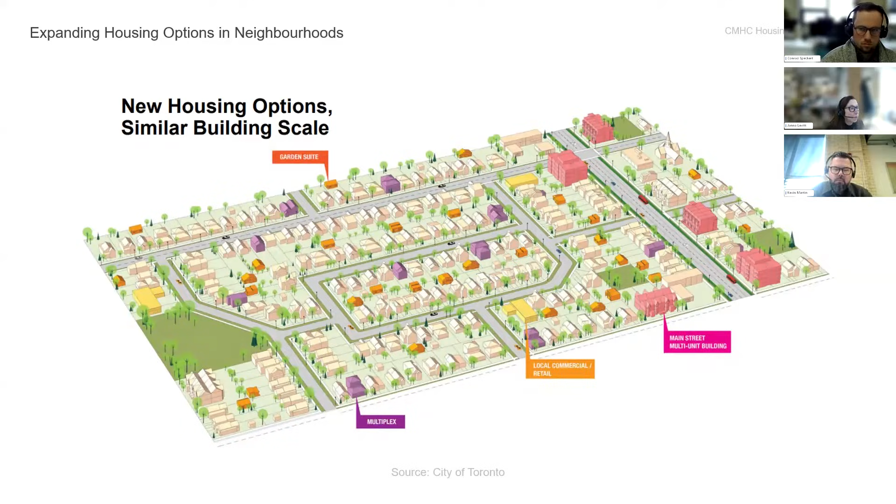So there have been a lot of really good changes in the city of Toronto with respect to zoning regulations and the liberalization of zoning to allow more housing on what we would call in Toronto the yellow belt, single-family zoning districts in the city. We have worked hard with EHON in a lot of ways to start to allow for this kind of gentle density, which includes multiplexes up to 4 units, and now moving to up to 4 stories, plus small apartment buildings up to 6 stories. The diagram that you see in front of you is from the City of Toronto, and it shows their goal to upzone existing single-family neighborhoods to support more diversity and introduce this kind of gentle density.

What this leads to is a kind of rollout of a building typology that's quite limited. You only can have, except at the corners, single aspect apartments, which means you can only have windows on one side. Very difficult to get fresh air and ventilation, so the whole passive ventilation strategies are very limited. And although it has certain efficiencies, and you can argue greater efficiencies with large scale buildings, for small scale buildings, it becomes very challenging to do something that's cost effective.

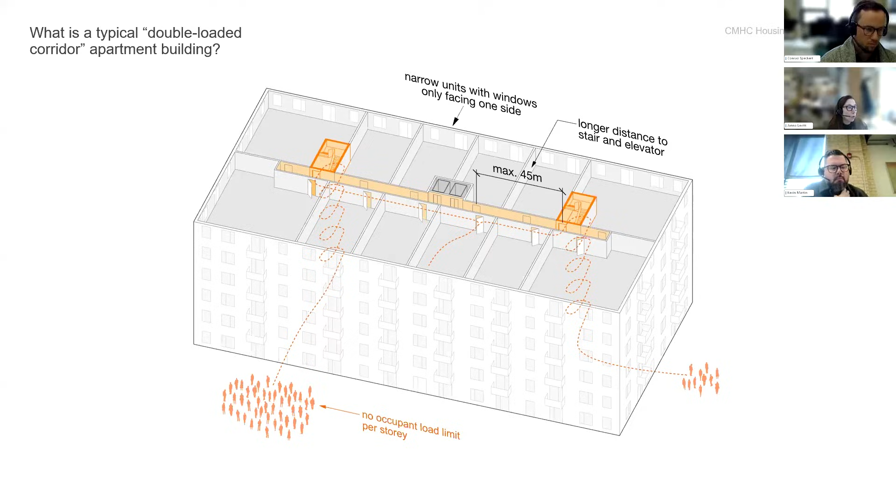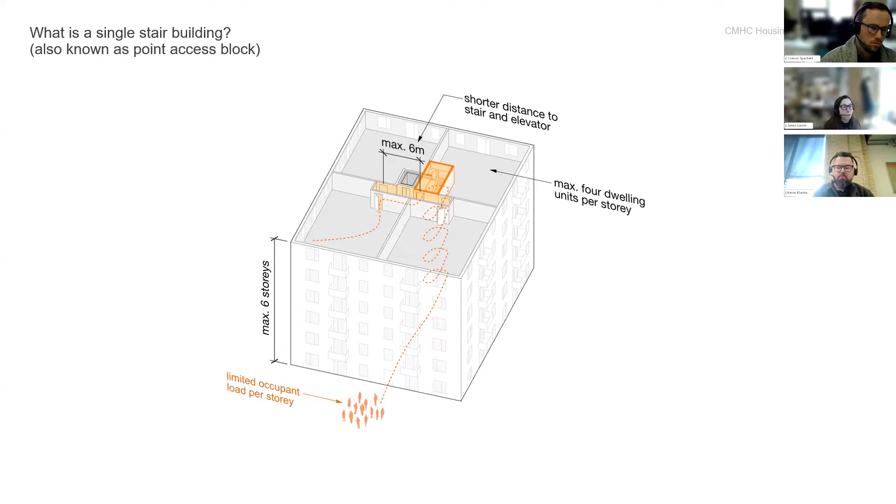The concept does not apply to large scale buildings. This is really for small scale buildings. So what does that mean? That means a maximum building height of 6 stories, a maximum of 4 dwelling units per floor, a limited occupancy load per story, and a short travel distance to the exit. These are the kinds of prescriptive measures we're introducing to compensate for the reduction of 2 stairs to 1. And we would argue, and there's a lot of work by consultants that make the compelling argument that this is equal, if not greater, than having 2 exit stairs.

So the missing middle problem is one we would say has to do with allowing changes to the building code to make the development of smaller sites more viable. Making missing middle and mid-rise housing easier to build to us is as much about reducing the exiting from 2 to 1 exits, so that you can get more residential floor area per floor plate, and also allows for the development of smaller lots.

And when I say that, I mean, when you can build smaller buildings, you move away from multi-unit residential that requires a large amount of capital to fund the project. You can also get away from land assemblies because you can build on a smaller site. And you don't have to, right off the bat, acquire large properties to develop a multi-unit residential. So it opens up the amount of lots that are available as infill and new lots in primarily municipalities that are well developed at the moment, but can accept a turnover at the scale that we're talking about here.

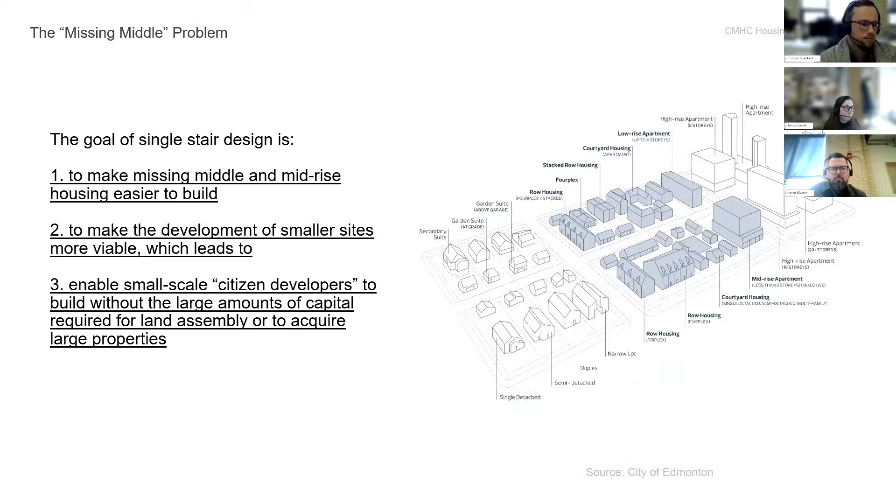Hi, everyone. So as part of the CMHC Housing Supply Challenge, LGA over the past year has been collaborating with 10 other architects and building code experts across the country to develop single stair designs. And these are for different types of small residential buildings of up to 3 and 6 stories in height. Each team has submitted an alternative solution to the authorities having jurisdiction for review.

So some of you may be asking, what is an alternative solution? Applying the prescriptive provisions, the acceptable solutions in the code, is one option for compliance. They, by default, meet the code's stated objectives. But the other option is the use of alternative solutions. These have to satisfy the same objectives assigned to the prescriptive code. And so in other words, any proponent of an alternative solution has to demonstrate that the alternative solution performs as well as a design that is prescriptive, as well as, not well enough.

And the intent statements, when we look at the requirements in the code currently for 2 exit stairs, speak to limiting the probability that persons and emergency responders will not have a choice of alternative exit. And so what that means is that any alternative solution that eliminates the choice must therefore demonstrate that the probability of this risk is mitigated to the same level of performance.

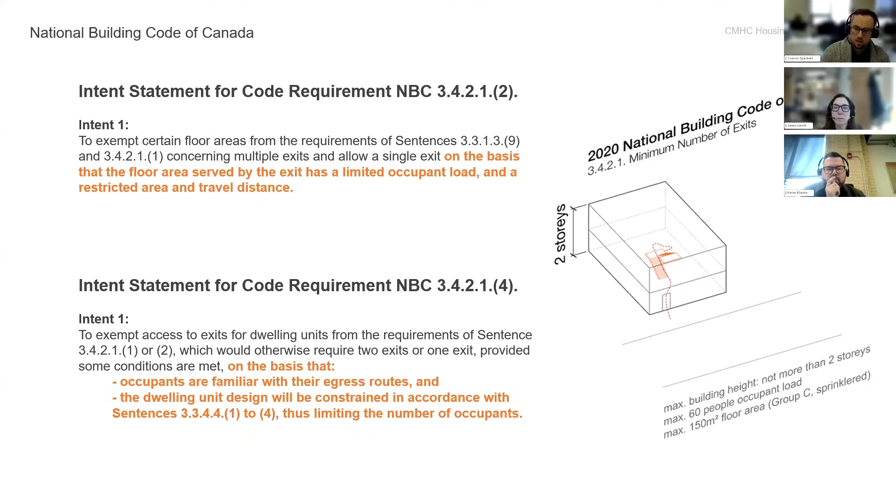But the intent statements around the exceptions also speak to the basis that floor areas can be served by 1 exit if they have a limited occupant load, a restricted area, and travel distance. Another intent statement also speaks to the basis that you can have 1 exit if occupants are familiar with their egress routes and the dwelling units are designed and constrained to limit the number of occupants.

Single stair in Canada is also not a new idea. It's been receiving a lot of attention recently, but we can go back to 1984 when 2 architects wrote a research report for CMHC documenting the differences between Canadian apartment building layouts and other jurisdictions. In 1993, a very well-known Canadian architect, Eb Zeidler, wrote an essay and then a news article specifically on this issue, saying that if there is an intent to develop Main Street housing, the requirement for 2 exit stairs along with parking requirements is a very significant barrier to doing so.

And in the mid-1990s, the former assistant director of the Ontario Building Code wrote a study proposing single stair changes to the code. And so today, 40 years since the original CMHC work, this technical issue is receiving more attention. And the US also revised their limits on single stair about 20 years ago in recognition of the performance of sprinkler systems. And so a discussion around alternative solutions to address this issue across Canada is long overdue.

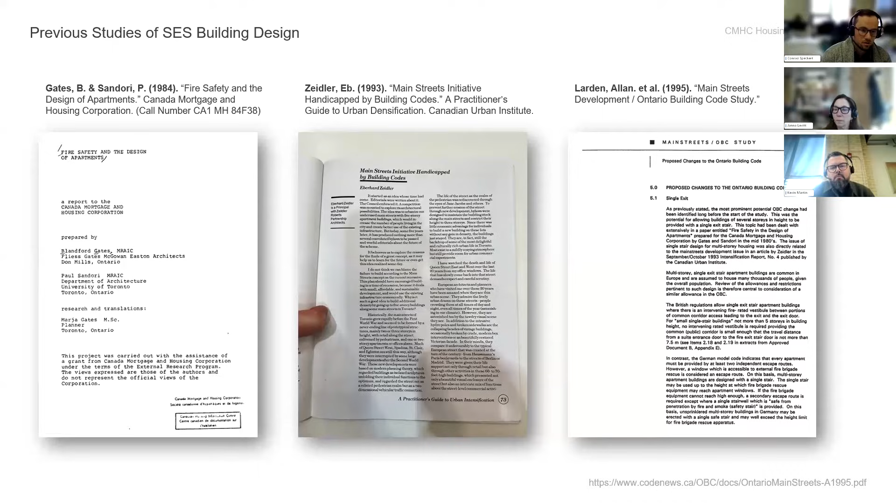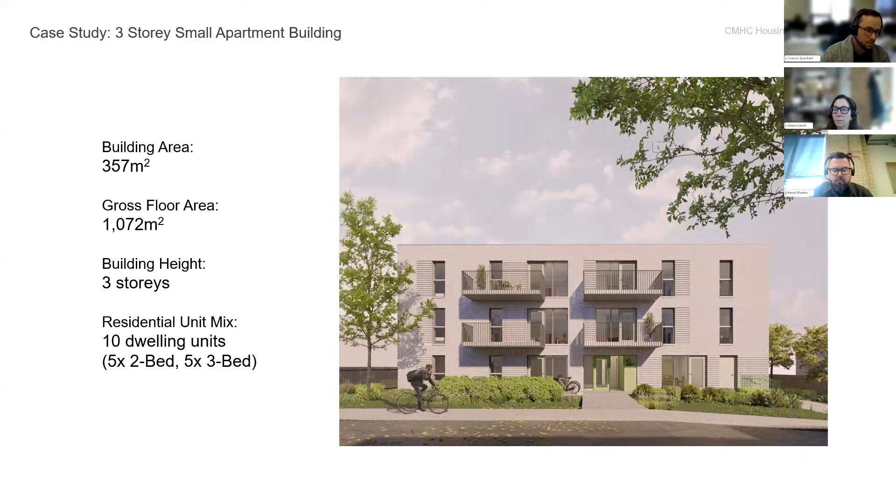Now here's a rendering of one of the projects that we are looking at for a 3-story small apartment building with 10 dwelling units. There's 5 2-bedroom units and 5 3-bedroom units. The zoning bylaw says here that you can build a small apartment building or you can build a row of townhouses on the same lot. And so typically a developer would turn this into a row of 4 townhouses. But in our case, the land belongs to a community land trust and they are looking to build rental housing.

With single stair, the difference between these 2 scenarios on the same property and with the same overall building footprint is yielding 4 extra bedrooms and, more importantly, a fully accessible building with an elevator where otherwise it would not be accessible.

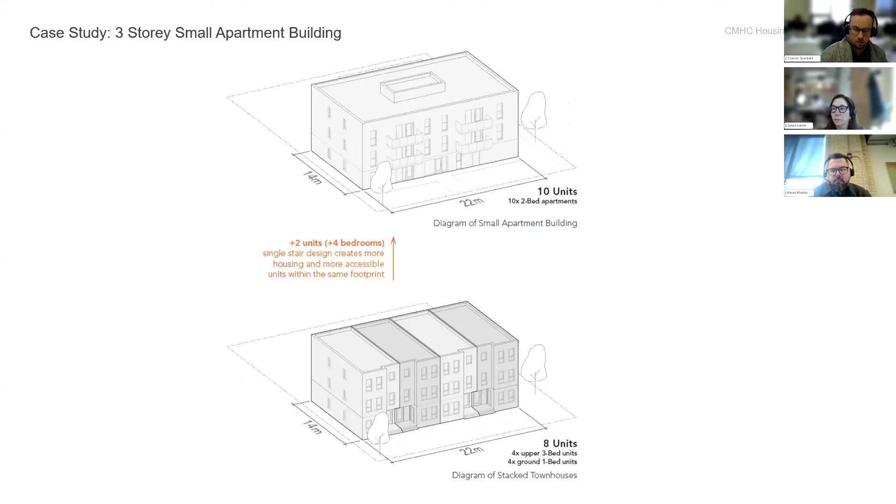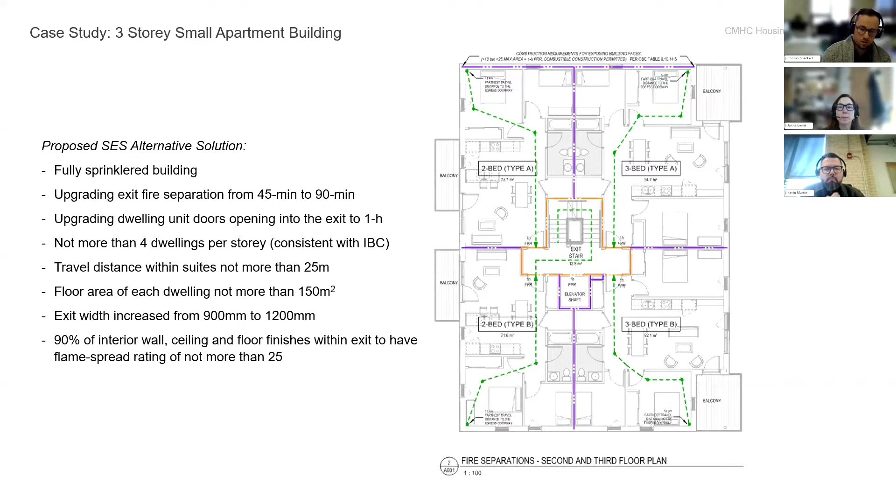Here's a very quick overview of the safety measures that are being proposed as part of this alternative solution. The design was developed with an expert building code consultant and has also been peer reviewed by a third-party fire protection engineer. And so the building is fully sprinklered, whereas the prescriptive code does not require sprinklering. The compartmentation of the exit is increased from 45 to 90 minutes. The travel distances are very limited, and the total occupant load served by the exit is only 20 people per story, which is a third of what the code currently allows for any floor area served by 1 exit.

Now, before I hand it over to Kevin to talk about the prototypes, I'd just like to share a quote from 1984, 40 years ago, from that CMHC report, which states that when a stair is directly accessible from surrounding apartments, it becomes highly visible and a familiar feature that apartment dwellers know well. They know where it is and where it goes. It is not a mysterious construction at the end of long corridors, hidden behind steel doors. And this may be an important safety benefit for both fire and other types of emergencies.

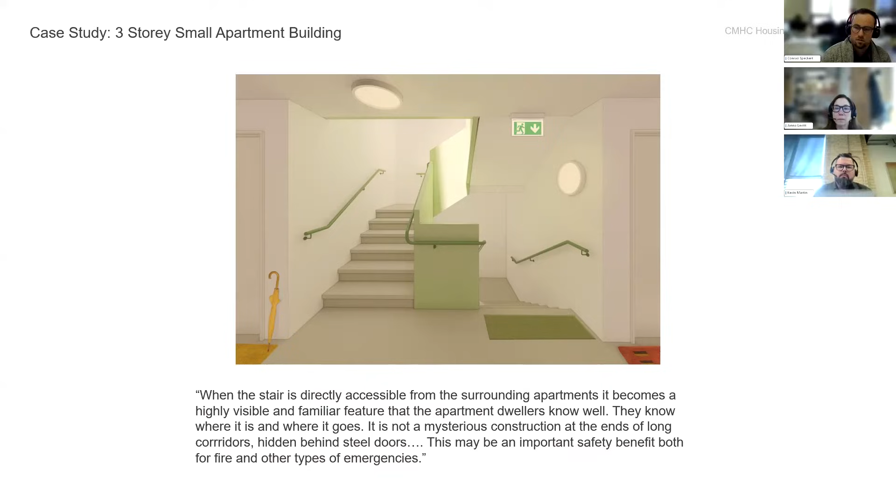And so what this really means is that psychological factors must be considered in addition to physical factors in the planning of our building designs. It is important that exits are used as a matter of daily routine so that the occupants are familiar with and comfortable with them. And so we really must ask, how does the building code influence the design of our buildings, our exits, and what alternatives are available? With that, I'll pass it over to Kevin.

So a lot of questions have come from people asking to empirically quantify the benefit of single stair design for small scale housing. So in addition to the site-specific pilot projects undertaken by LGA and the partner firms, LGA also decided to develop 6 prototypes you see on the screen for single exit stair building design at 3, 4, and 6 stories in height to demonstrate the differences. Each of these designs is for infill housing using typical lot sizes across Canada, ranging from 25 feet to 66 feet in width.

Each design includes a comparison with prescriptive egress requirements as a measure of floor area efficiency, construction cost, projected rental income, and residual land value. We also looked at them in terms of design flexibility. Sometimes the benefit is used for more GFA, but in other designs, we show how it can add more windows, better unit layouts, and more generous bedrooms.

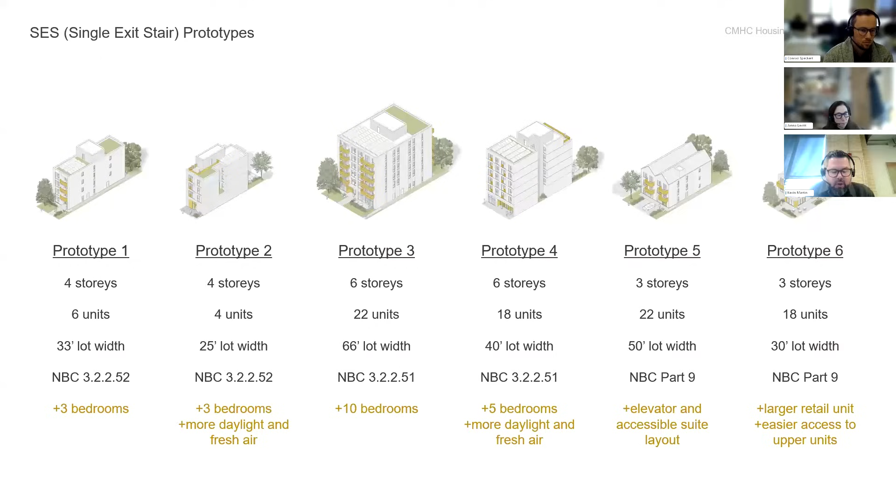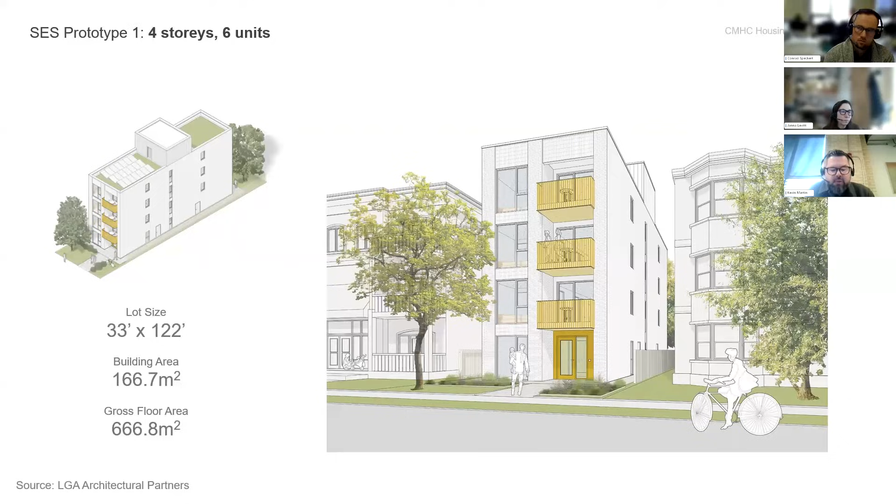It's important to note that there is an inverse relationship between the size of the building and the impact. In other words, the smaller the building, the more impactful the solution can be. So just to walk through a few of the prototypes, here's prototype number 1, a design for a typical 33-foot wide residential lot, as a 4-story small apartment building. The typical floor plan you see on your screen contains 2 two-bedroom units on each level for a total of 6 apartments. This means that the single exit stair serves a total of 8 people per story, or 24 people cumulative.

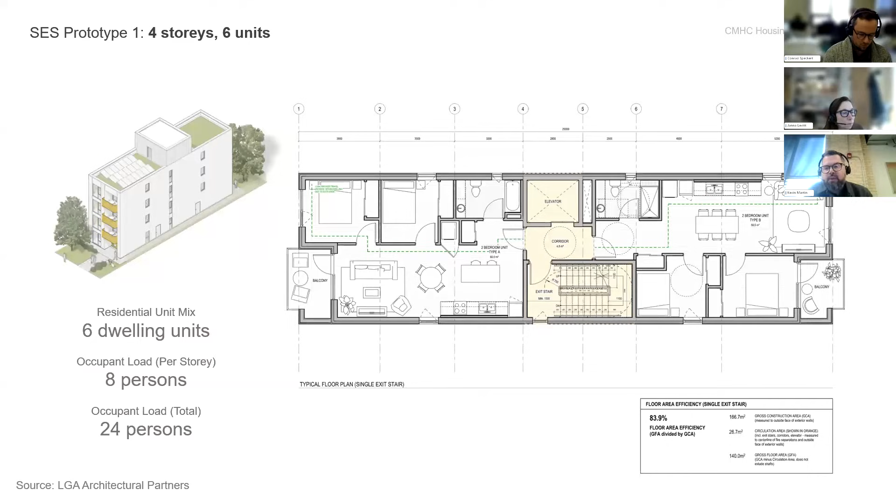When we compare the typical floor plan to a scissor stair design as permitted by the NBC, we see a floor area efficiency difference of about 10.5%. The footprint of the scissor stair deletes one of the bedrooms on each floor, resulting in lower rental income by about 14%. The single stair design also costs about $88,000 less to build than the scissor stair scenario. So we can see how it could provide some flexibility to unlock some of these smaller sites.

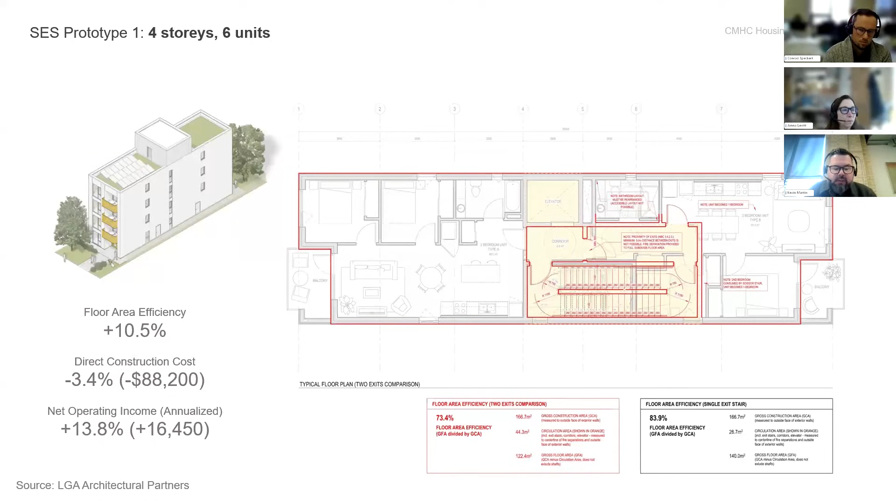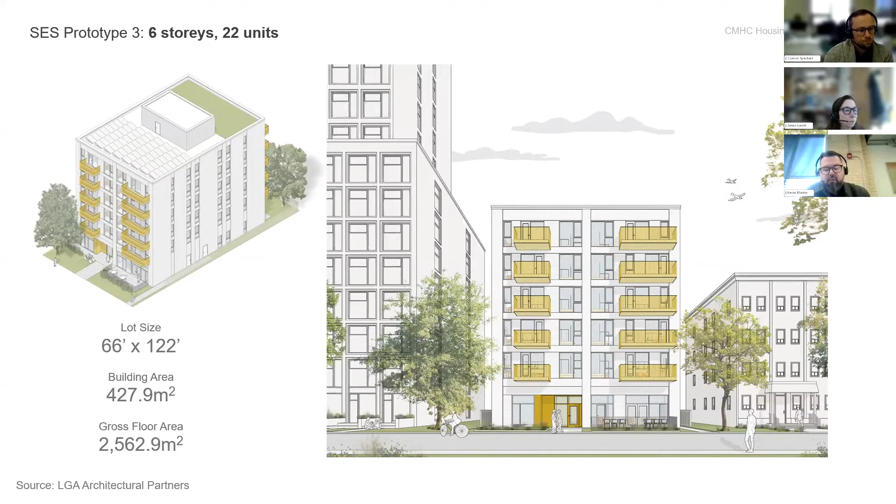Next, here's another prototype for a 6-story apartment building on a 66-foot wide lot with a total of 22 units. This was the larger prototype we studied. The typical floor plan contains a mix of 2, 3, and 4 bedroom units for a total of 12 bedrooms per story. This means that the single exit stair serves a total of 24 people per story, or 120 people cumulative.

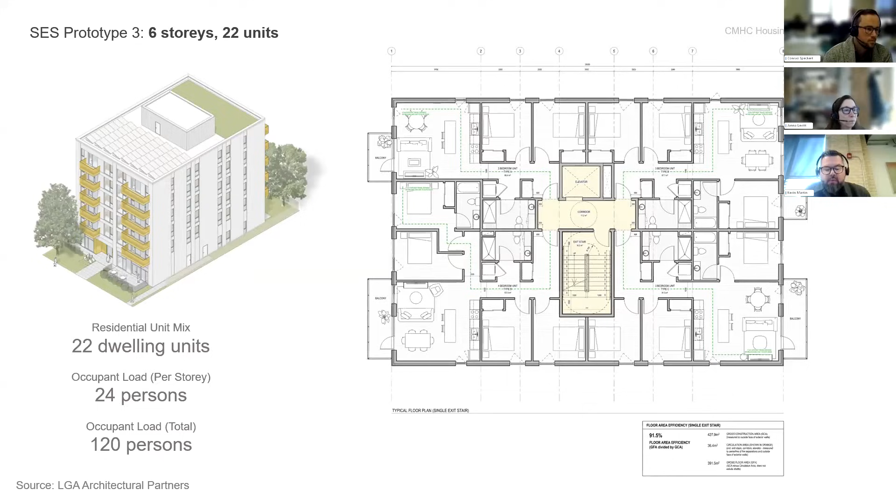And when we compare this typical floor plan to a scissor stair design as permitted by the NBC, we see a floor area efficiency difference of around 4.5%. The footprint of the scissor stair deletes 2 of the bedrooms on each floor, resulting in lower projected rental income by about 6.8%. The single stair design also costs about $68,000 less to build than the scissor stair scenario, depending on what kind of smoke control system is provided.

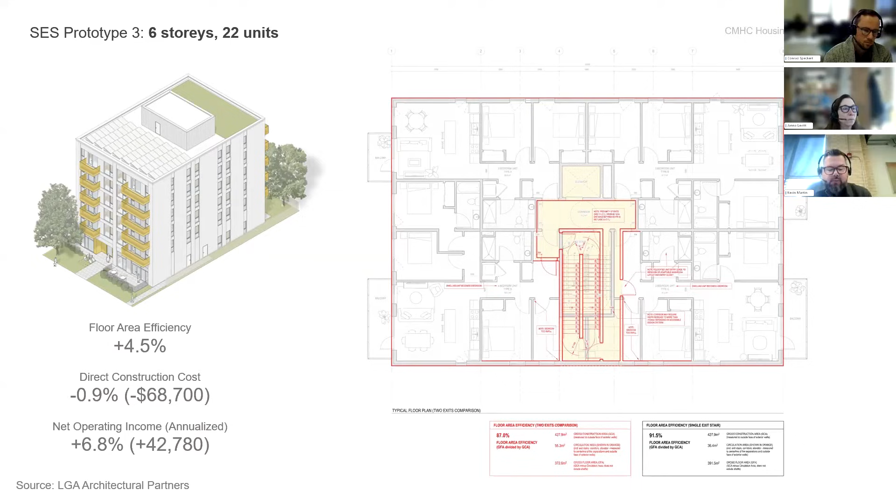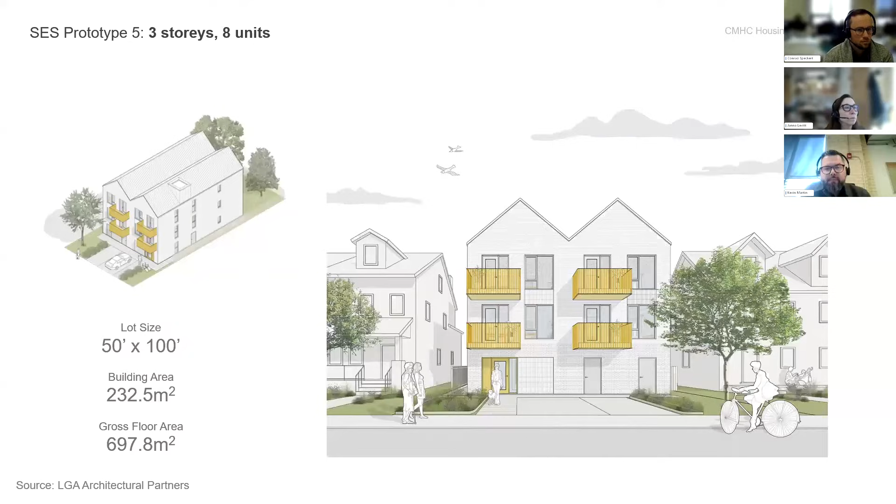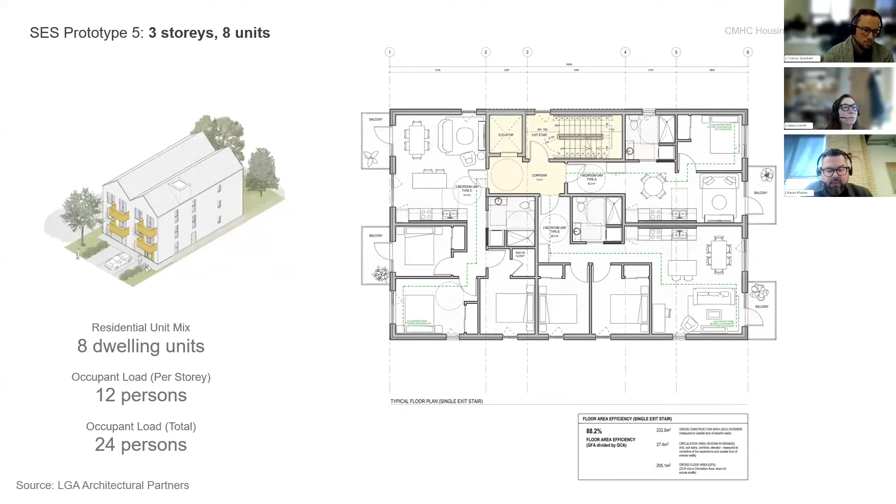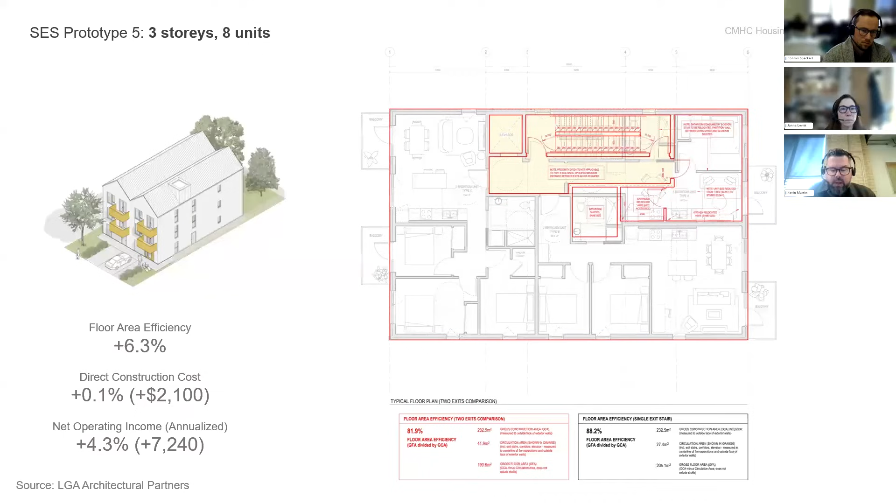Finally, just to round it out, here's a design for a typical 50 by 100 foot property with a 3-story small apartment building under Part 9. The building contains 8 units in total and is shown here with an elevator and adaptable dwelling units on all floors. Overlaying a scissor stair onto the floor plan, we see a floor area efficiency difference of 6.3%. In this case, the cost of sprinklers with the single stair design compared to the cost of the scissor staircase results in a small increase in overall construction cost. The footprint of the scissor stair shrinks the one-bedroom unit to become a very small studio, and it becomes impossible to draw with accessible design standards.

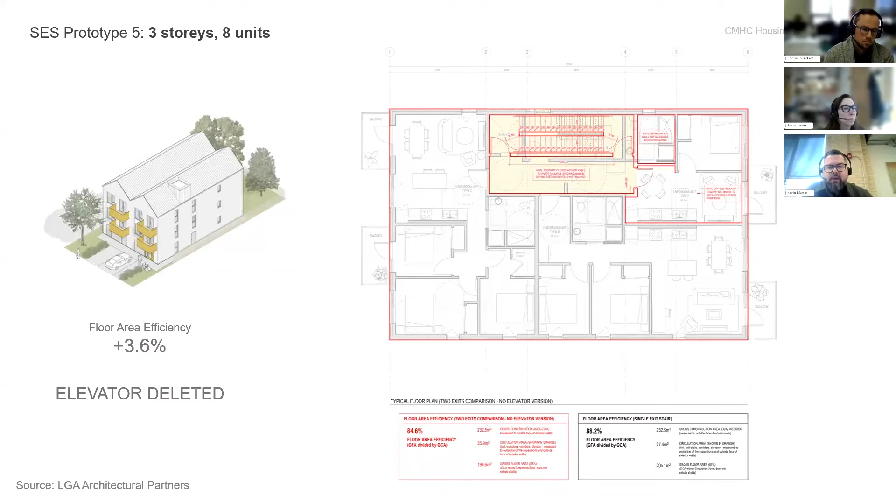Overlaying a scissor stair onto the floor plan, we also tried a version where the elevator is deleted. So in the first version, we were trying to include an elevator in a Part 9 building to provide that adaptability of all floor plates. What this implies is that the floor area of the second stair can offer design flexibility, not just necessarily extra bedrooms, but a different approach to a building within this footprint. It can be used to create bigger units, more bedrooms, or to provide an elevator where otherwise not required. I'll pass back to Conrad to walk through some of the background on costing and performance.

And so when we take the 6 prototype designs, what we had done with the 6 costings and the 6 pro forma analyses was draw a bit of a trend line between the construction cost estimates. Again, each of these quantifies the cost of additional fire and life safety measures comparable to the cost of a second exit stair. For Part 3 buildings, these are the larger ones, we found an average decrease in construction costs of around $74,000. And for Part 9, we find a slight increase due to the cost of the fire sprinkler system. Then the other thing we look at is the average increase in net operating income on an annualized basis. And so again, when we look at the cost to operate or maintain additional measures, we must also factor in the net operating income impacts.

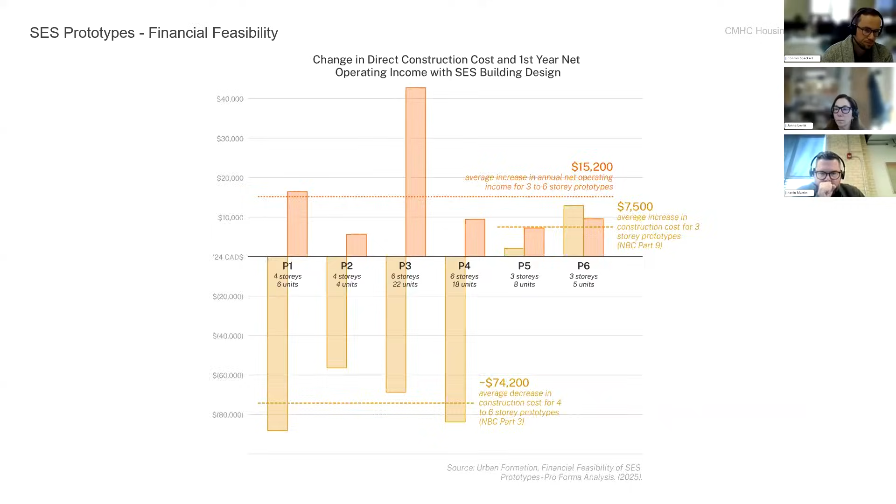And then using these inputs, upfront costs and operating income, we collaborated with a professional planner to look at the longer-term financial feasibility of these buildings, both in terms of a rental housing scenario, so the sale price after 10 years, as well as residual land value, which is a very key metric in determining whether or not a project is feasible in terms of how much someone can pay for the property.

As part of the CMHC work, we were also asked to estimate and project the impact that this solution would have on housing supply. And so we looked at doing this as an analysis across the country. It was quite a daunting task, but we looked specifically at major streets where zoning reform for 6 stories is being discussed, and at multiplexes in neighborhoods at the 3-story height. We then assumed an adoption rate around labor capacity of the construction industry, an adoption rate as to how many of these buildings would actually be built on an annualized basis.

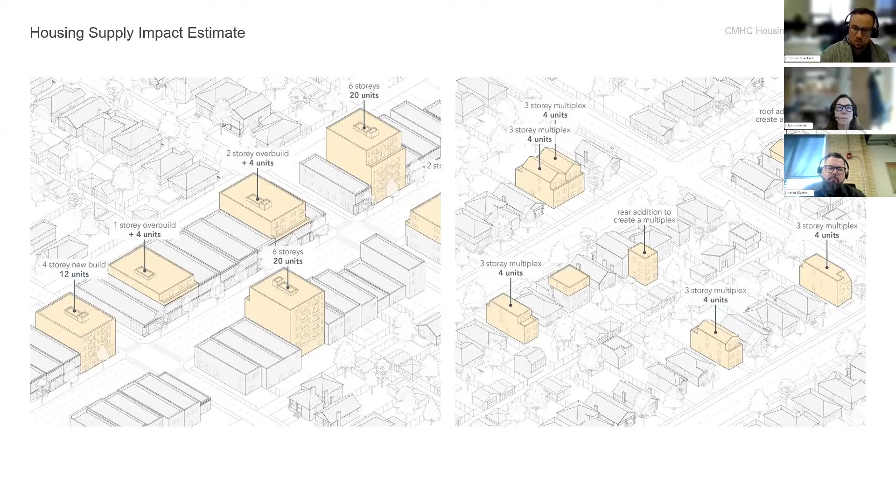And again, as with any construction or impact estimate of policy, it's a variable exercise, but we estimated that within neighborhoods there'd be an impact of around 3,000 additional bedrooms per year, and on major streets up to 6,000 additional bedrooms. And again, beyond housing supply, what this really is about is also providing more design flexibility to unlock these smaller sites in the first place.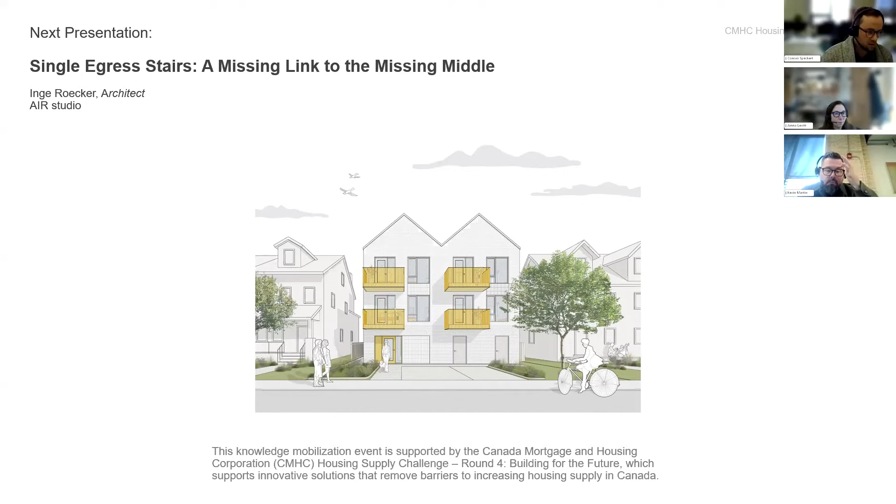Now, we have 3 presentations from 3 of the architects. Unfortunately, Inge Roecker has a family emergency and is not going to be able to join us today. But she's given permission for us to share the slides. Inge and I had presented at UBC recently, so I am going to try my best in the time available to share a few words with each of those slides. So Air Studio is an architecture office in Vancouver and Germany. Inge specializes in the design of small-scale housing.

Now, you've seen a similar slide already. In Vancouver, much like Toronto or Edmonton and other Canadian cities, there is a missing middle issue. Recent zoning reform is changing that and opening up a discussion about building code, electrical code, and other technical standards that may not be optimized for this scale of construction.

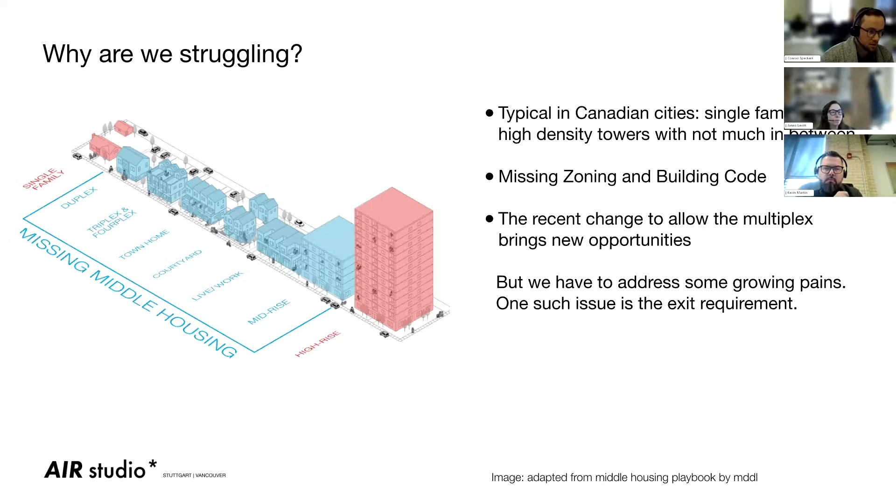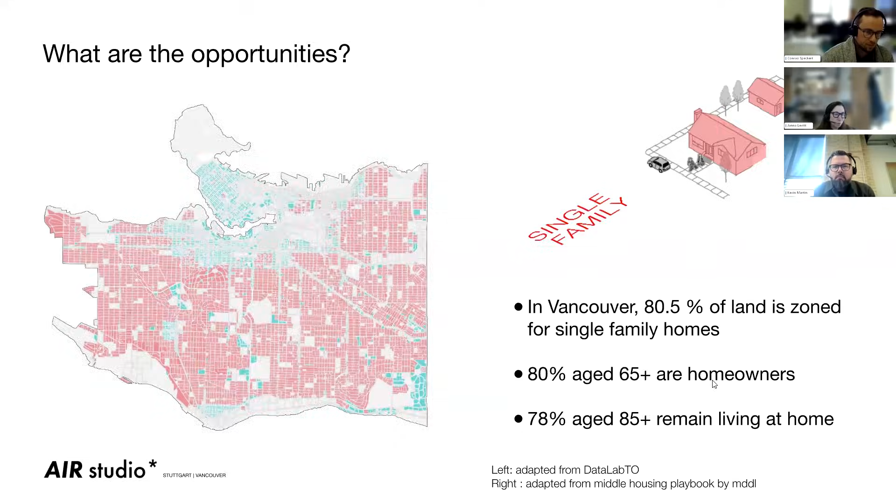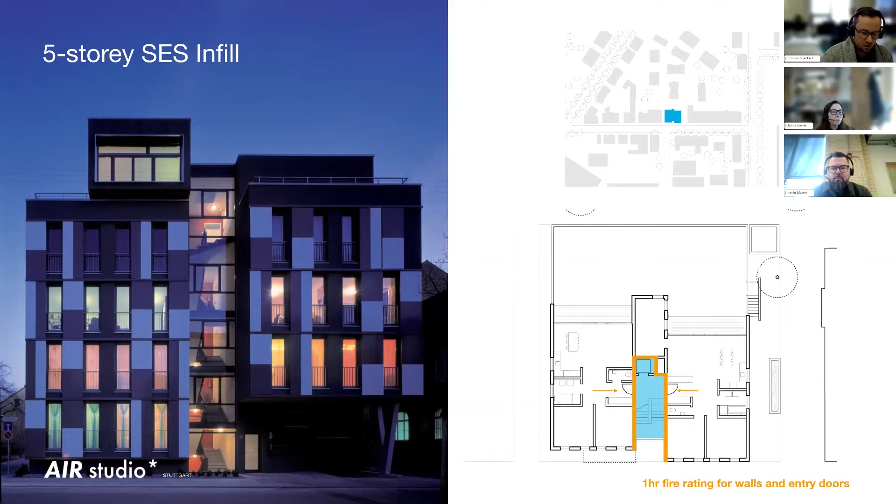Here's one of Inge's previous projects, a 5-story single-stair building in Germany. Let's move that off. If you take a look at the floor plan with bedrooms facing one direction and living rooms to the other, each unit has daylight from both sides and cross ventilation. The other interesting thing about this floor plan is the elevator cab size, which allows a wheelchair to roll in and out, but is not required to be stretcher sized.

Here's another one of Inge's projects. One of the big differences between these plans and the North American context is that the units open directly into the stair. Tomorrow we'll talk a lot more about this in detail, but the basic premise in Germany is that there are 2 methods of compliance. Up to 22 meters in height, about 7 stories, you can design a building to rely on ladder rescue, and the apartments can therefore open into the stair. Or up to 60 meters in height, that's 20 stories, ladder rescue is not relied upon or required, but the exit stair must be compartmentalized as a smoke-proof enclosure.

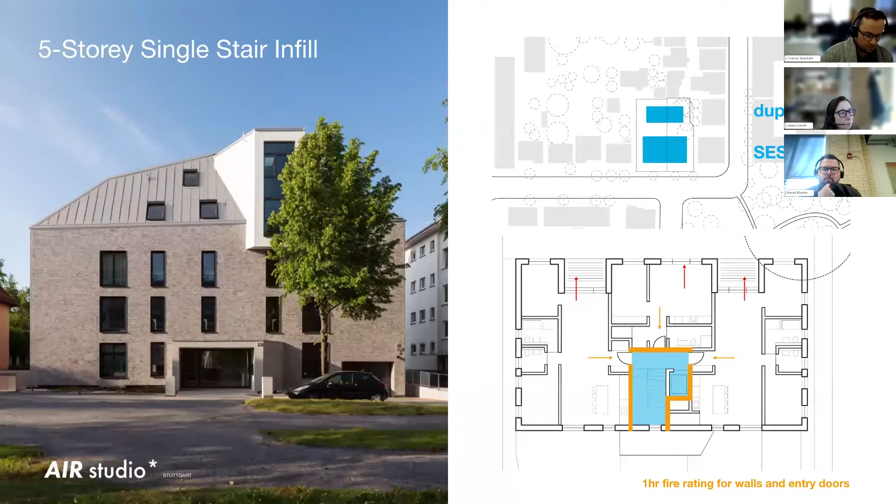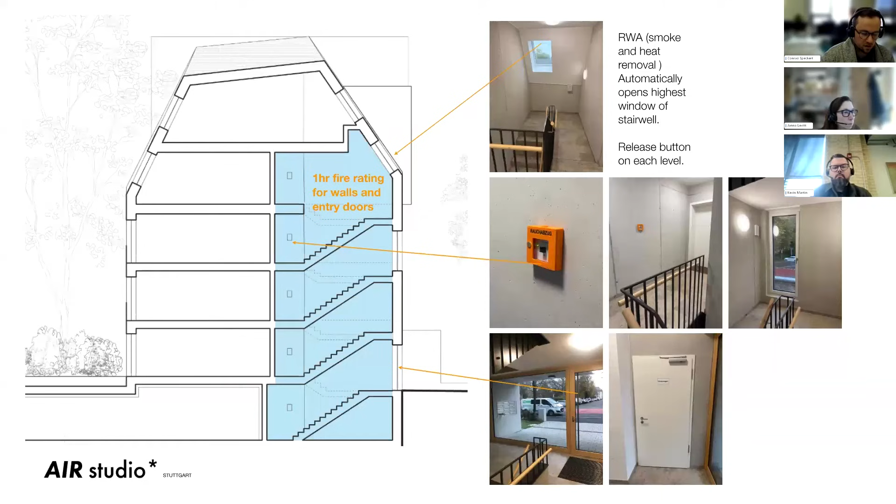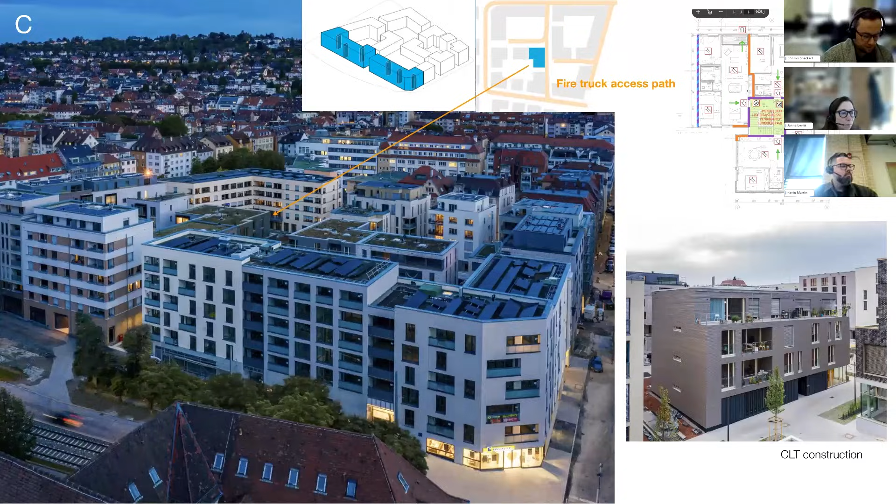This image shows a master planned courtyard community consisting entirely of single-stair apartment buildings in Germany. The floor plans show the difference on the same plot of land between a series of small single-stair point access blocks versus a row of double-loaded corridor buildings designed to the prescriptive code. The statistics show how many are family-sized units with multiple bedrooms and windows on multiple sides.

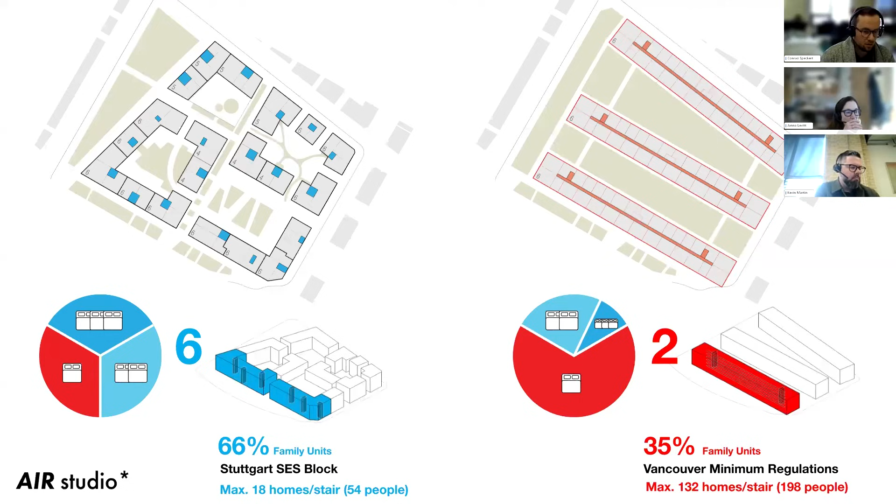Inge also looked at how many stairs actually exist in the project, and there are more stairs serving fewer people in the single-stair scenario than the double-loaded corridor version. Each of these stairs only serves about 20 units and is highly compartmentalized. On the other hand, the 2-stair plan could have a 100-meter long hallway and a lot more people sharing the staircases.

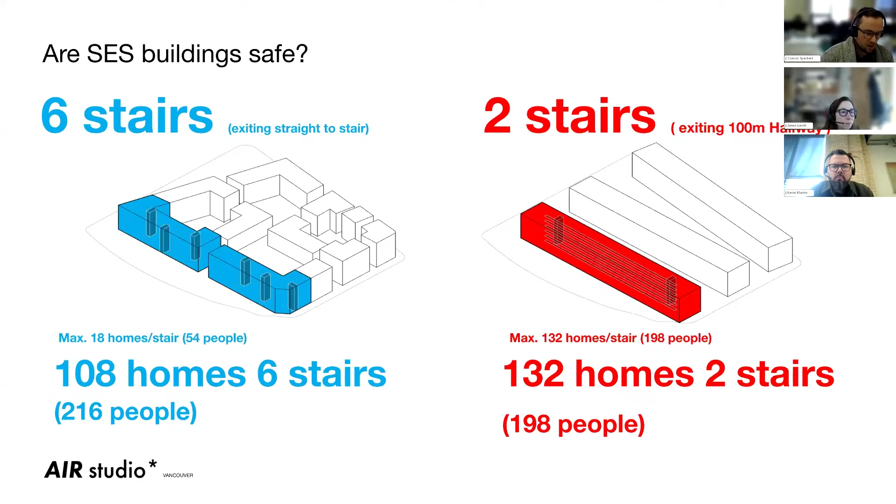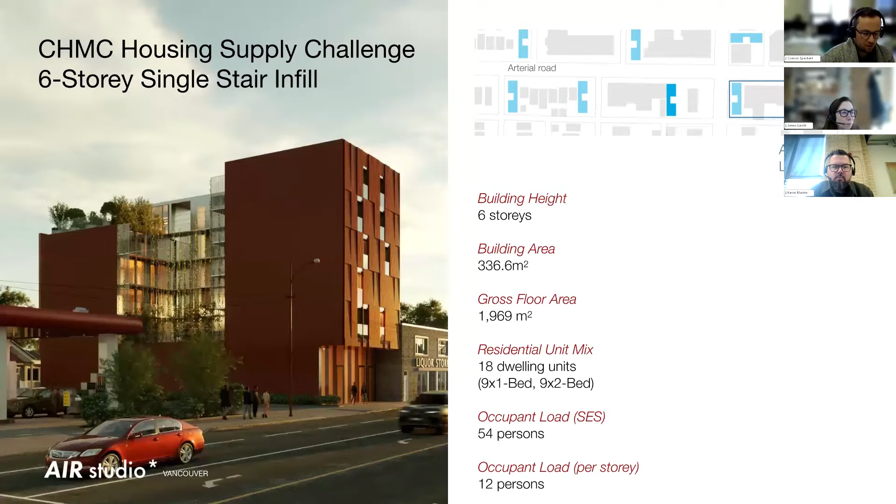And so those are a few case studies and perspectives from the architect. We'll just end with a few slides of the pilot project that Air Studio is working on. So this is a 6-story building with 18 apartments and a commercial unit on the ground floor. Now, in terms of occupant load, there are 54 people using the stair, which is less than the 60 people that the building code allows for any floor area served by one exit.

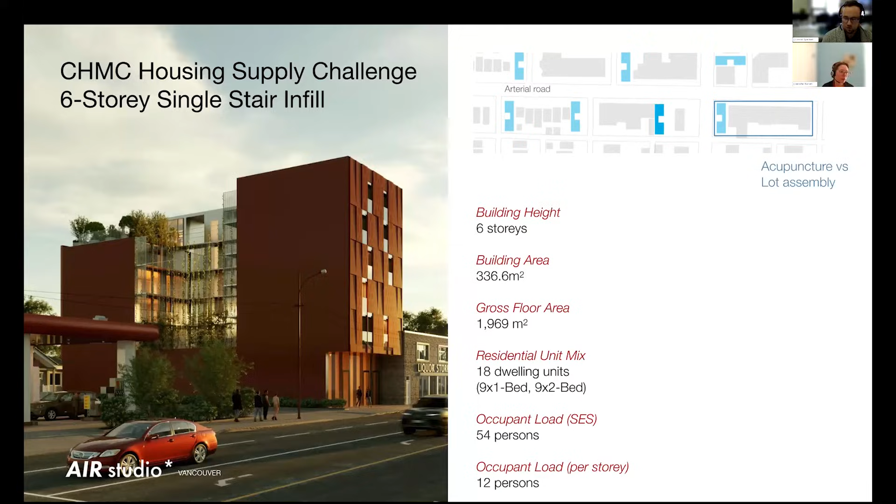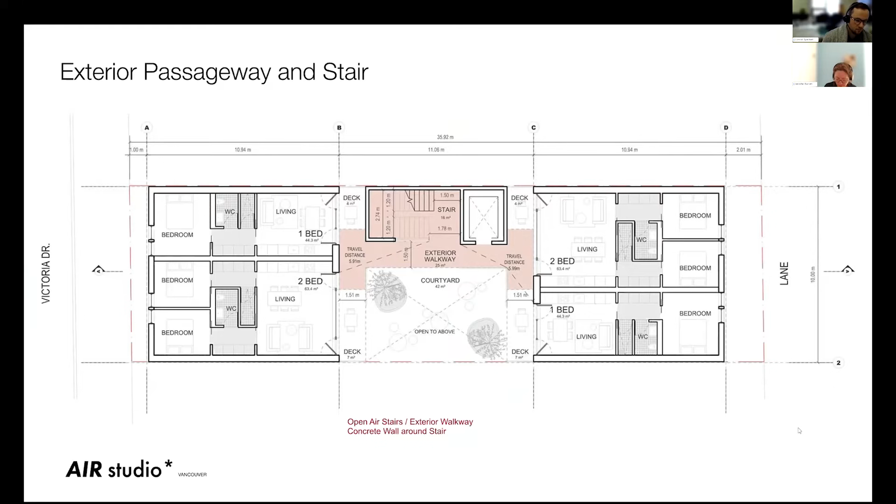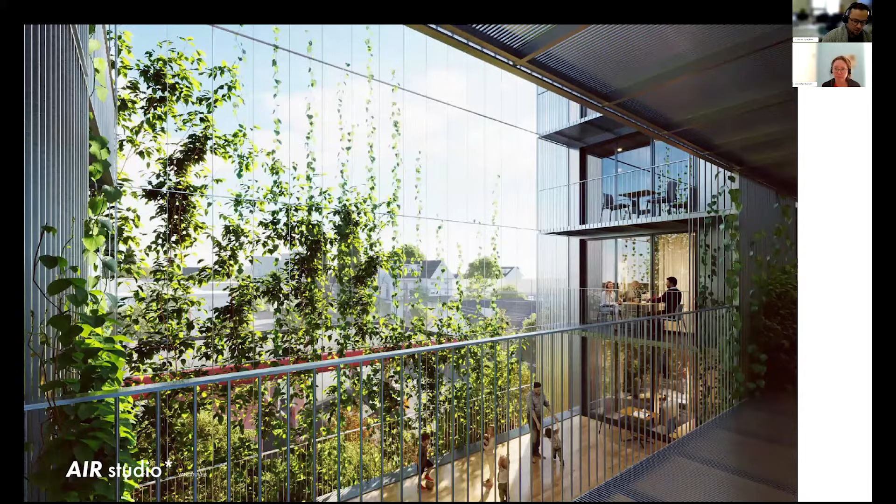Here's the floor plan. It's an interesting solution from a smoke control perspective with an exterior stair that is partially enclosed and protected from adjacent openings. And this limits the probability of any smoke infiltrating the exit much better than any prescriptive design. Here's a rendering showing the design with the central courtyard. You'll notice that the finishes on the exterior passageway and the exit are non-combustible, and this limits the probability of any fire growing beyond the point of origin.

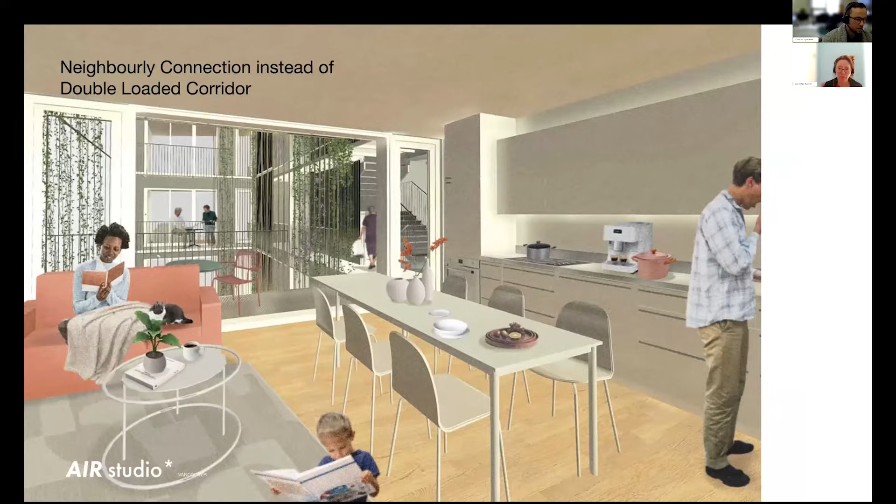As a quick image showing the courtyard, tomorrow you'll hear from an architect from Seattle with a very similar building that was built in 2016. And so a few concluding points from Inge. SES buildings are healthy, they are neighborly, and they make for better urbanism. And with that, we'll pass it on to Matt Boland to learn about his 4-story pilot project in Waterloo, hopefully with no more exciting interruptions.

Right. I definitely hope so too. I always assume that any IT snags are my fault because I'm not technically savvy, but so glad to know that this one wasn't.

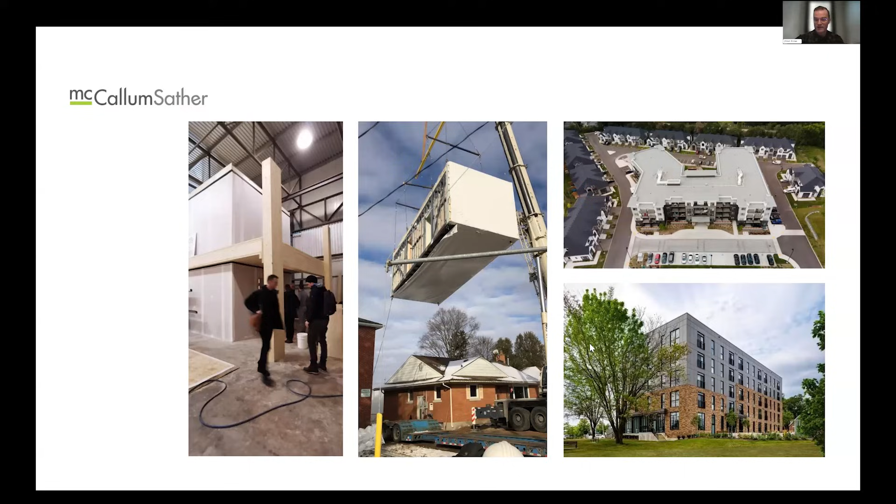So as I said, within our toolkit of what we've been using in the missing middle space and in generally the innovative housing construction models, we've had some really good success over the past number of years, specifically with panelization, prefabrication. We've come to understand pretty deeply the benefits and the risks associated with things like modular, both volumetric and panelized, but also just really tried to build a deep understanding of conventional delivery of housing and how it works, both in the Part 9 and the Part 3 space. So as you work from left to right, you can kind of see how we've started to build that experience.

And specifically in the last number of years, we've actually had some real success with CMHC's Rapid Housing Initiative program, which was a real shot in the arm for pushing innovation, specifically when it comes to prefabrication. So these are 3 specific projects that all leveraged a fully mass timber solution on a very, very tight and quick turnaround, which allowed us to meet that rapid housing delivery initiative. And each of these provided the same type of model that we were able to use and then repurpose based on A, the site, and B, the client specific needs and requirements.

So on the left, it was the YW project in Kitchener, supporting women battling homelessness. The center, smaller site, limited ability through servicing to provide as many units for men actually in a transitional living environment. So we were able to tailor that for them. And then the one on the right is actually a recent project that we just got our test results on today, which is exciting because they were very positive. And that's actually the same type of project, but just done to a 6-story and passive house standard.

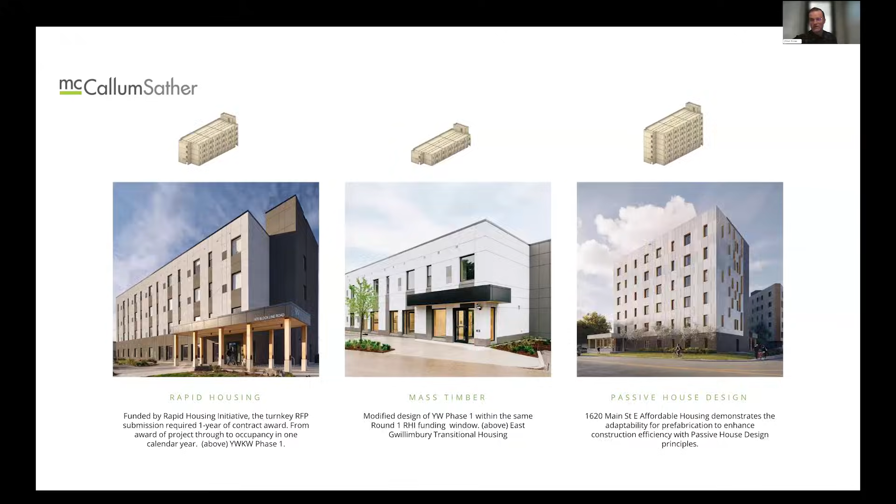So again, even in terms of understanding some of these code implications, it's really helped us as we've now started to push and focus ourselves in towards, okay, how can we make a mark here and start to execute projects in this single stair environment? And again, some of that great information that we've already seen here today from LGA, where they broke down typical sites, I think they were talking about 20 feet up to 60 feet wide. We're looking at it in a very similar way.

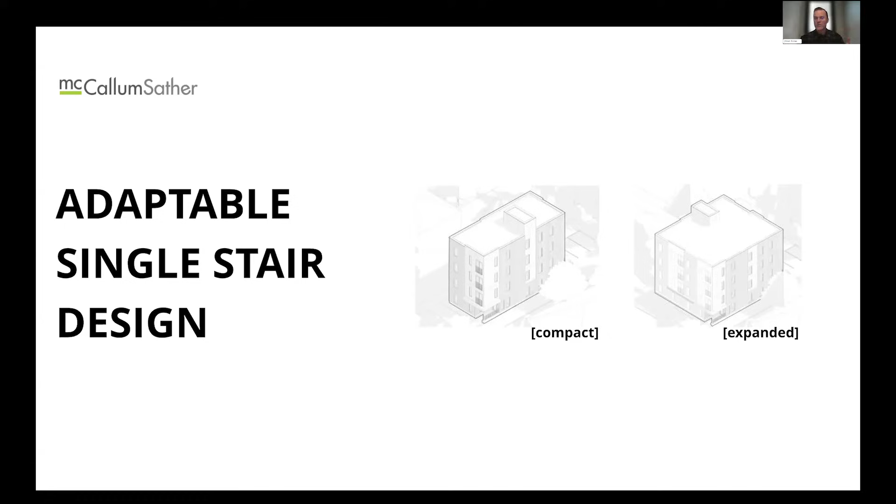We're looking at, okay, well, what are some of the conventional infill sites that we're going to be given, or that our clients in this case are going to be bringing to us? And how can we respond with a single stair solution that works and then is adaptable in the same way we've had that success with the rapid housing solution? How can we take it and make it adaptable for the very compact, but also for the sites where we have a little bit more room and we can expand it out, still within the context of that missing middle and infill density. So this is the first project.

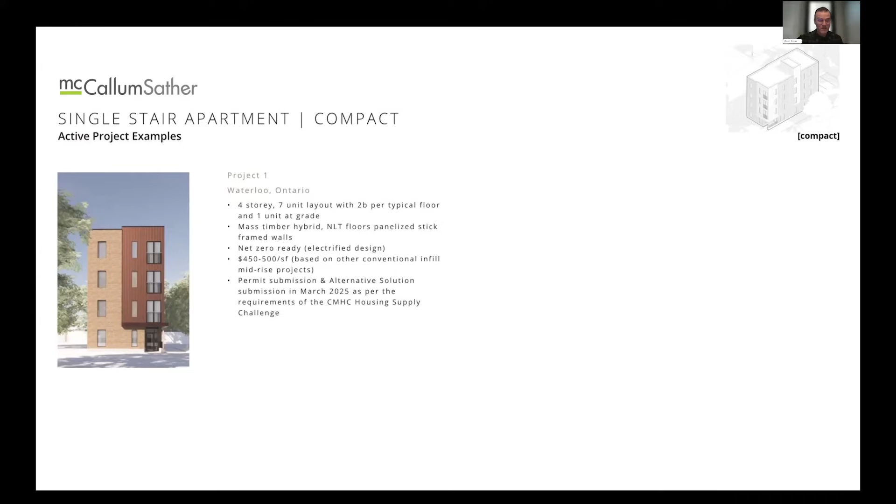This is the project that's part of this study that Conrad had outlined. This is in Waterloo. It's a 4-story, 7-unit layout, 2-bedroom typical layouts. We are looking to use our hybrid mass timber solution, so stick frame walls and mass timber floors. It's very efficient, very cost effective, allows us to panelize the whole system off site and bring it just in time for a very quick erection. We've done a full electrification, and this permit submission is now in the final stages of basically being submitted in the city of Waterloo under the study.

Some of the specific fire safety measures that we've been working with Vortex Fire on integrating, and again, consistent with some of those other projects that we've seen featured today, is we are going to be putting in a sprinkler system, fire alarm and smoke alarm, smoke control measures, emergency lighting and signage. We have specific things we're doing with our suite doors in terms of compensatory measures. Travel distance in terms of this design, we're making sure that even within the suites, there's a maximum travel distance of 12 meters, which, because it's a compact site, wasn't really a challenge for us. We're having a maximum number of 2 suites per floor.

Obviously, we're looking in the expanded versions to increase that up to 3 or 4, but in this one, we've actually just baked that right into our code-required solution and capped that, which does help in terms of our rationale and justification. And then obviously also an occupant load maximum as well, which again keeps us consistent there.

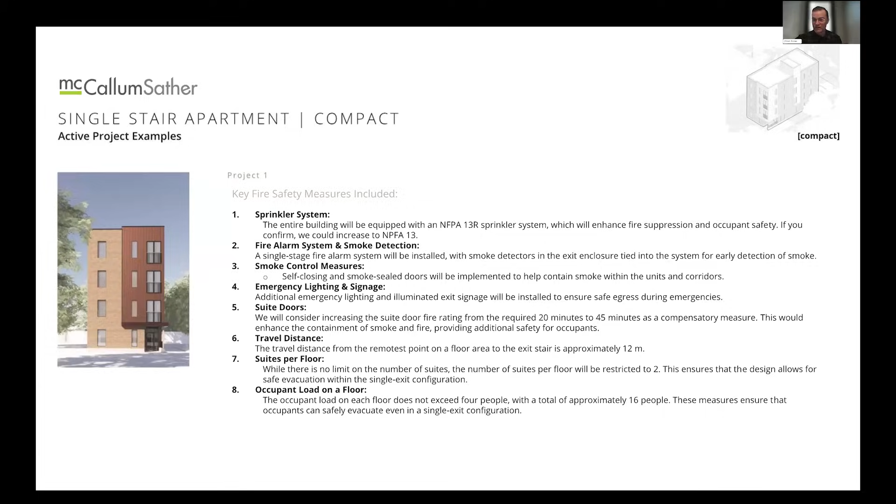It's an interesting point that we have in our relationships with all the jurisdictions that we work in, specifically here in Waterloo. We've already gotten some feedback about the discomfort that they have about accepting this. But I think it again shows one of the great things about this initiative, that we are pushing and really trying to make sure that we require a firm response to this very practical, pragmatic solution that we're offering that just makes sense and is a really great solution for the type of development we're trying to do there, that is so important and so necessary if we want to really take a bite out of this housing crisis that we are having.

So again, as I said, this is a 15 meter, so just under about 50 feet, site here, which is again compact. It's characterized as a low-rise neighborhood. However, this particular site is also in a part of town that is student housing, and some of the zoning has actually changed the character of this neighborhood. So the typologies and the sites themselves that are narrow with single detached housing built form, bungalows and 2 stories, are here able to be now deployed with this very narrow solution in this apartment that we've come up with. We have a single drive aisle with a limited amount of parking in the back, again, just trying to meet those zoning requirements.

And it's noted too that one of the important things for us as we worked through with the client group on this one was actually being able to have the project not require site plan approval. Because we're under 10 units under Bill 23, we wanted to say, okay, how can we find a site where we can come in and not require that planning approval process, which is part of some of the new flexibility that's offered under Bill 23. Obviously, there's pros and cons, but one of them is that we can deliver these projects a little bit quicker. So that's what we're looking to do here.

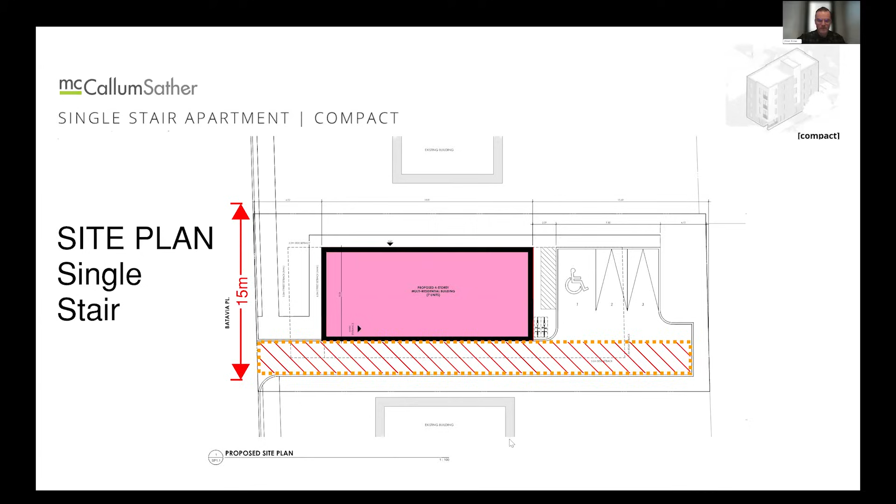So as you can see, in terms of the floor plan layout, we do have that single stair exit. We do have full accessibility. There is a supportive services group that we're working through on this site, and that's a big part of what they do. The people that they're catering to, they are very inclusive in the community in terms of who lives in these spaces. But the elevator and the access and barrier free on all levels, not just the ground level, is something that's important to them in terms of having an adaptable solution here.

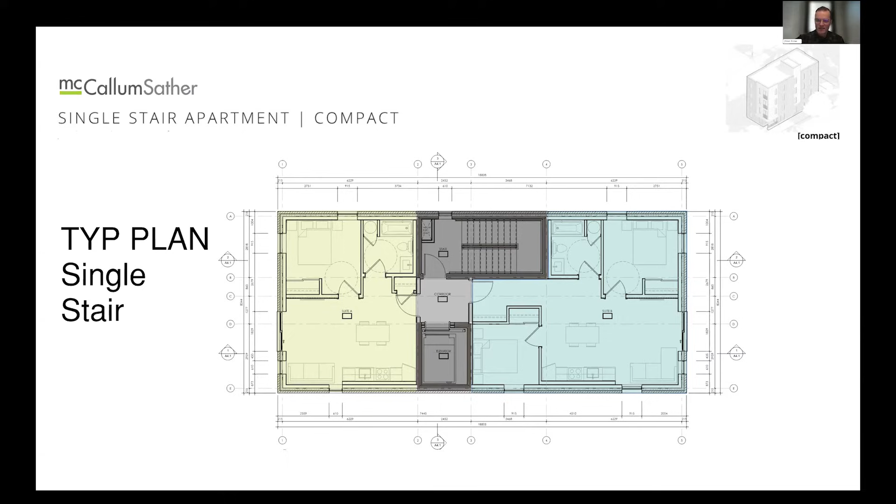And you can see, compared to a conventional design where you'd have a long corridor, we're able to really minimize that. We haven't created the open stairwell condition that we've seen and I've experienced referenced in Europe. But just based on the nature and the feedback we know we're going to get from the city, we've decided to do something that is a little bit more protected that way.

And then again, in terms of the comparison, one of the things we're looking to do, and this is not just for our not-for-profit development type clients but also our for-profit community, is being able to rationalize this and come to the table, as LGA did very effectively, talking about what is the actual cost benefit and what is the pro forma analysis on this stuff.

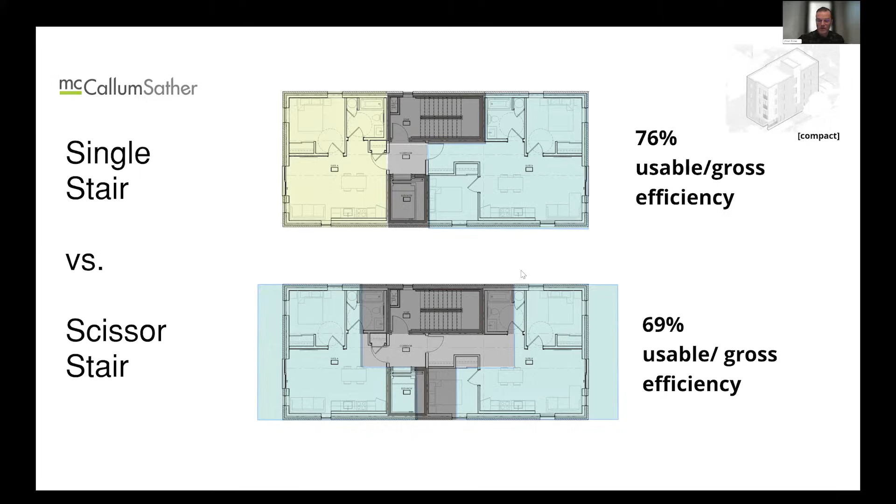And again, it just works very well on this extremely compact site. So that's the primary project that, again, we're submitting as part of the study and hoping to get some really good feedback on to be part of this group.

I did want to just talk a little bit, again, in terms of that adaptability. The same client we're working with here, we have a project in Kitchener, which is obviously just adjacent to Waterloo here in our community. And so this group we've actually worked on a few years ago, went through a process, a bit of an arduous process of doing an infill design, very long drawn out planning approval process that was really part of that frustration that I think has driven a lot of the change in terms of missing middle and how we get there.

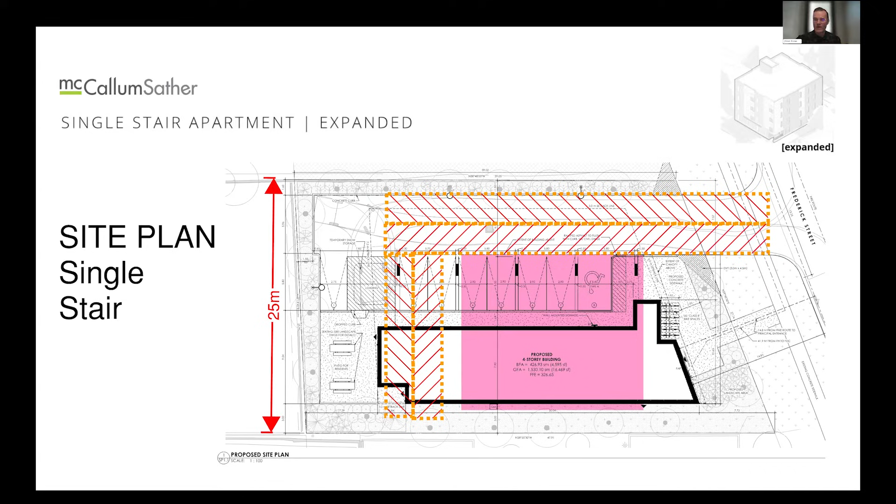And again, when we start to look at what we could have done if we had proposed or if we had pushed for a single stair solution, we could have done something that was much more flexible, had the ability to be more panelized and prefabricated and less site specific in terms of some of the technology, which obviously can bring down costs and speed up the ability to actually execute on these tight sites, which is oftentimes a challenge. So you can see here the nature of this double stair and corridor connecting. Overall, a design that we're proud of and we're happy to be working with the client on this one.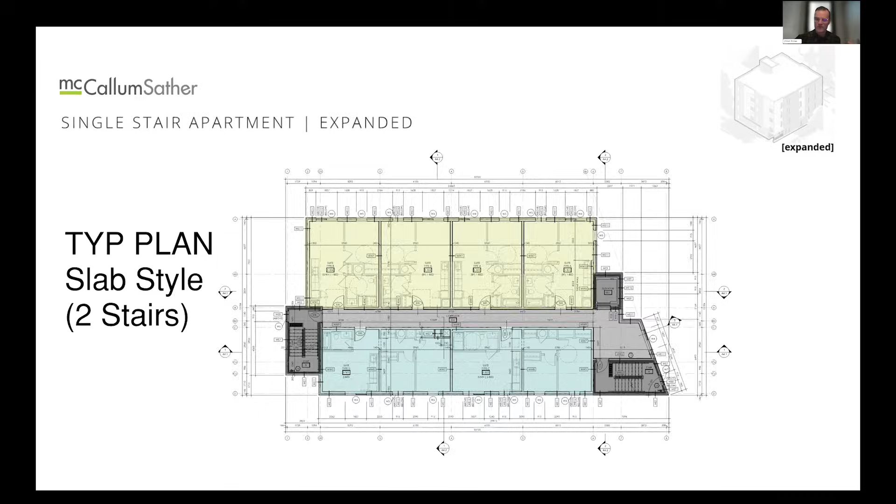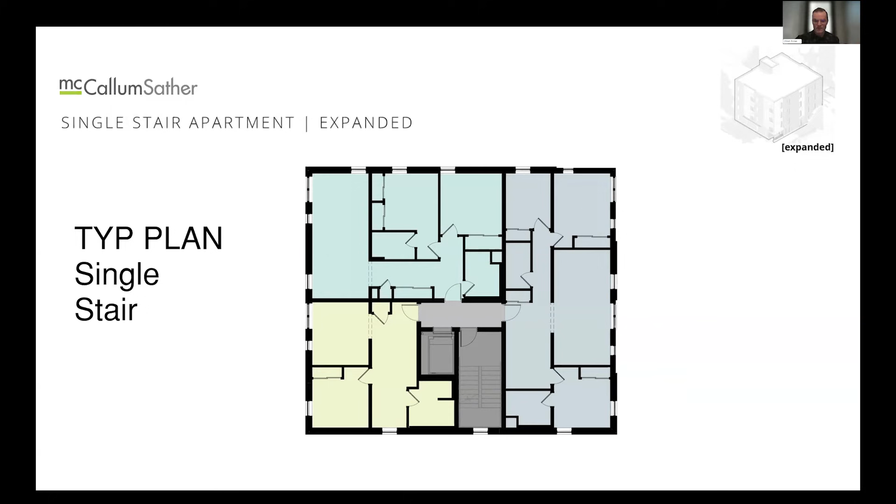But it has just, on reflection, come to us to say, well, if we could have used something again more like this, we actually could have created more, again, diversity of unit type in terms of 1, 2, and 3 bedroom, still gotten that very efficient design with the elevator access, with the single stairwell. And again, we could have really driven that efficiency of these units up significantly on the site, created probably a reduced building area.

And it's just something that, again, in terms of our next steps, as we keep driving to push this type of built form forward on these infill sites, we're excited about not just that compact, but also the adaptability of how we can start to push and pull, depending on the sites and depending on the user and the developer characteristics.

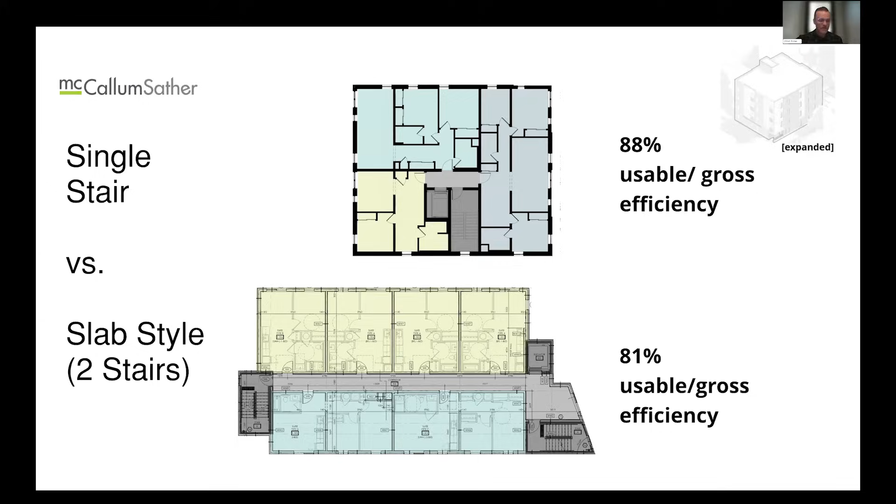So thanks very much. Looking forward to hear more and the Q&A. Thanks, Matt. We're going to jump over now to the next presentation from Office OU. So if you guys want to share screen.

Hi there, can everybody see our screen? And can you hear us? Hello? I assume yes. Yep.

So hi, my name is Euros and this is my partner Sebastian. We are a part of Office OU, and we are here to talk about a single stair project we're working on right now and just about to submit for permit at some point this week. The project is a small apartment building in the Bloor-Court neighborhood of Toronto. And it's basically exactly, I think, what we would describe as a missing middle.

So the site is located on a fairly typical residential street in downtown Toronto. The property has approximately 64 feet of frontage, or 19.5 meters. And there is a 12-foot right-of-way on the south side, which allows for the entry into the building to be from the side, not from the front. Once all the zoning setbacks are taken into account, we are left with a 15 by 15 meter deep floor plate and a building height as of right, which is 11 meters. So this is a three-story building, and we are still well within Part 9 of the OBC.

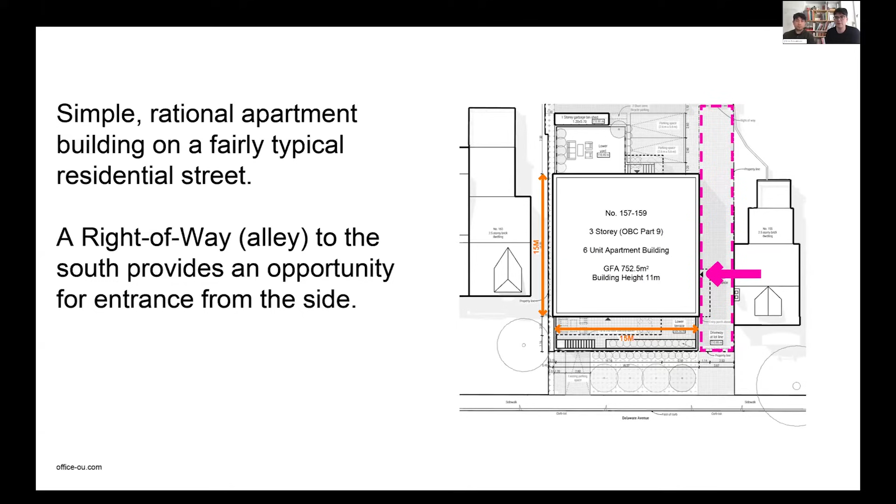The clients came to us with a particular vision, and it was kind of a vision for European-style urban living in downtown Toronto. So large, bright apartments, no more than 2 apartments per floor, all accessible and all accessed by a shared stair that is pleasant to use and naturally lit.

So I guess following the OBC, this was kind of our initial stab at it. You can see that there are 2 staircases, and it doesn't really work. For a number of reasons, it's very, very inefficient. We are not showing the basement plan here, but trying to find a way for both of these stairs to exit really compromises and chops the basement layout. And ultimately, it just didn't make financial sense.

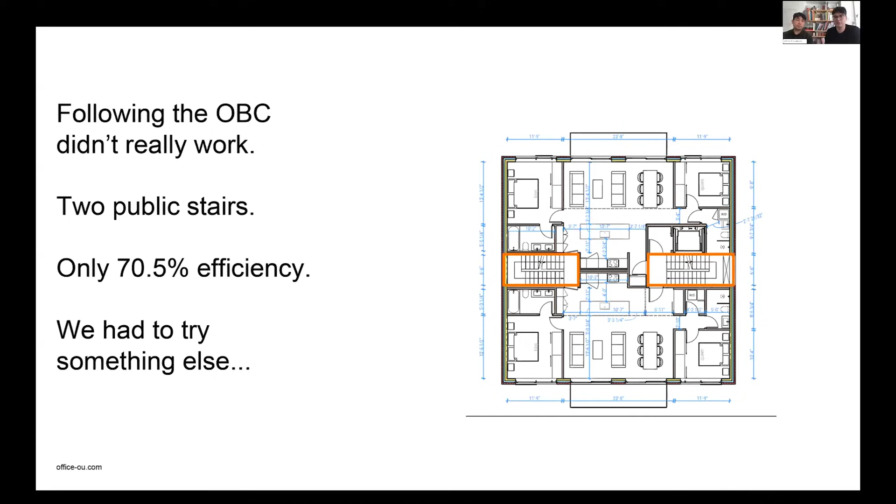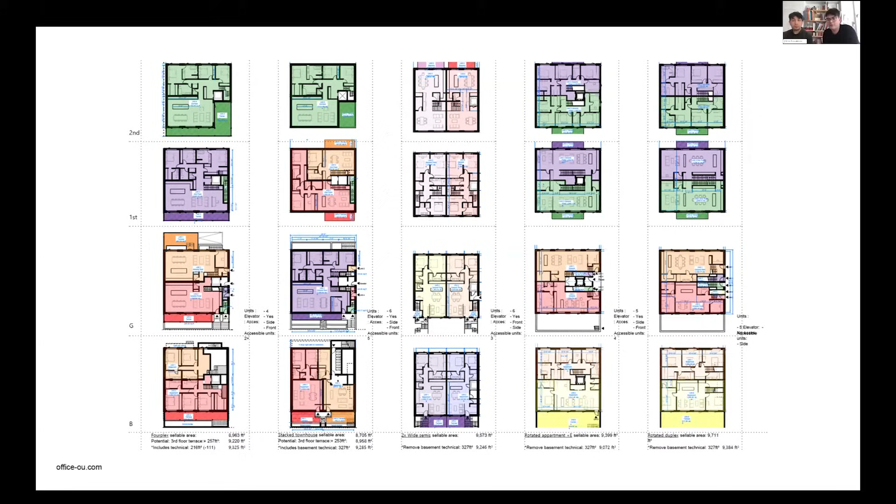So we had to try other things. And we tried lots of things. These are mostly different versions of stacked townhouses that give you a lot more efficiency, but make it very, very difficult to create accessible units. So I think it also didn't work. And in the end, we found there were only 2 reasonable options: either exterior stairs or a single stair.

With exterior stairs, there are a number of downsides. There is a loss of fenestration, there are privacy and security issues. The layouts are very constrained. And if there is a second stair added at the back to resolve some of those layout limitations, the cost of it is actually higher than the cost of sprinklering for a single stair.

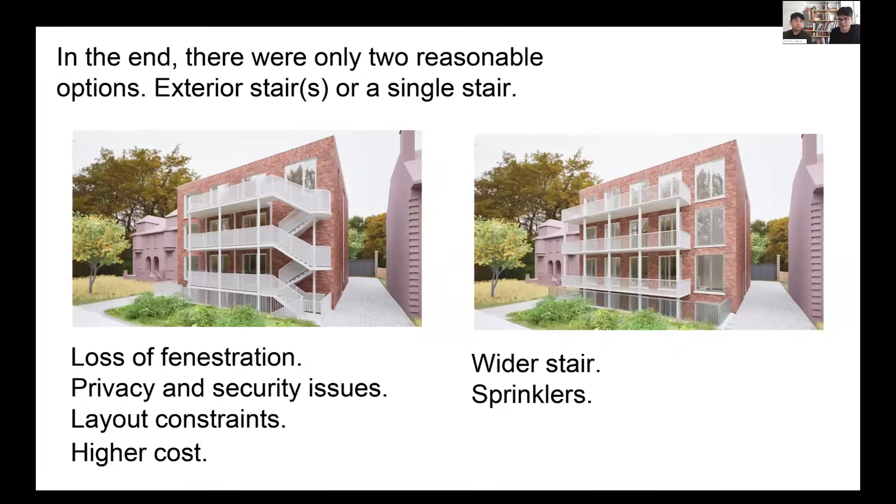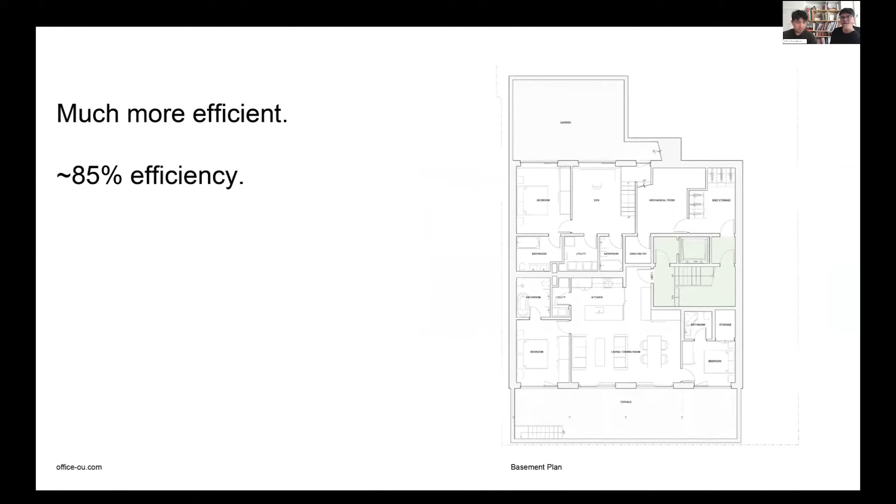And just to run through some of the alternative solutions that we're applying to make this work. Obviously, we are sprinklering the stair like many of the other projects that you'll see on the single stair website. So this is an NFPA 13R sprinkler system. The single stair itself is 1,200 millimeters wide. And it's naturally lit through a wall of glass block on the south facade. And in our view, the stair is actually going to be adding quite a lot of value to the project. It creates a much nicer entry for the occupants.

And we're also trying to encourage people to use the stair rather than the elevator by ensuring that the stair is the first thing that you arrive at rather than the elevator, which is very typical. And I think this goes back to what Conrad was talking about, making the stair really familiar to the occupants. It's something that they use every day. It's front and center in their consciousness of what the building is and what it means to them.

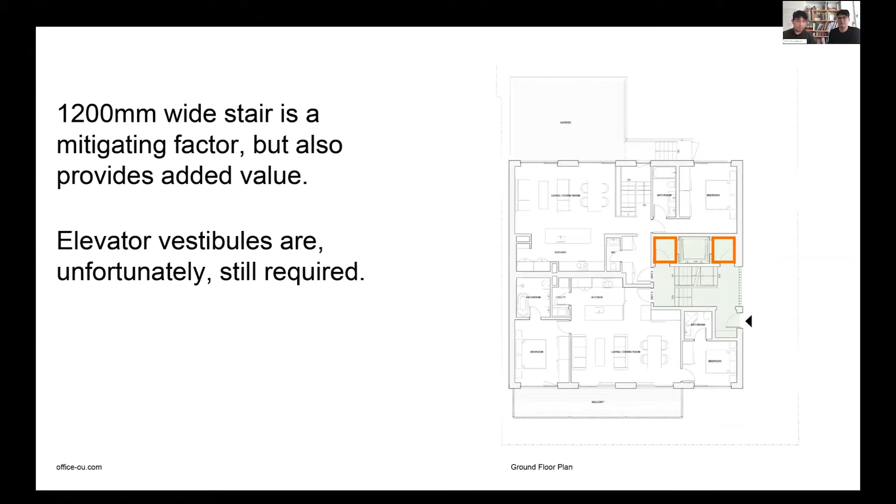You can also see that in the orange boxes, there are some elevator vestibules. Unfortunately, these are still required under the OBC because you can't have an elevator opening onto an exit stair. This is, of course, something you see quite a lot in European buildings, but we decided that given all the other things we're trying to do, it's not something we wanted to pursue at this time.

Some of the other measures: we are increasing the fire rating between the suites and the stair up to 1 hour, up from the typical 45 minutes. The door into the exit is 45 minutes, smoke seal doors rather than typical 20 minutes. And the flame spread rating of all the walls and ceilings in the exit is limited to 25. I should also note that there are balconies on every floor that act as refuge spaces for all of the occupants.

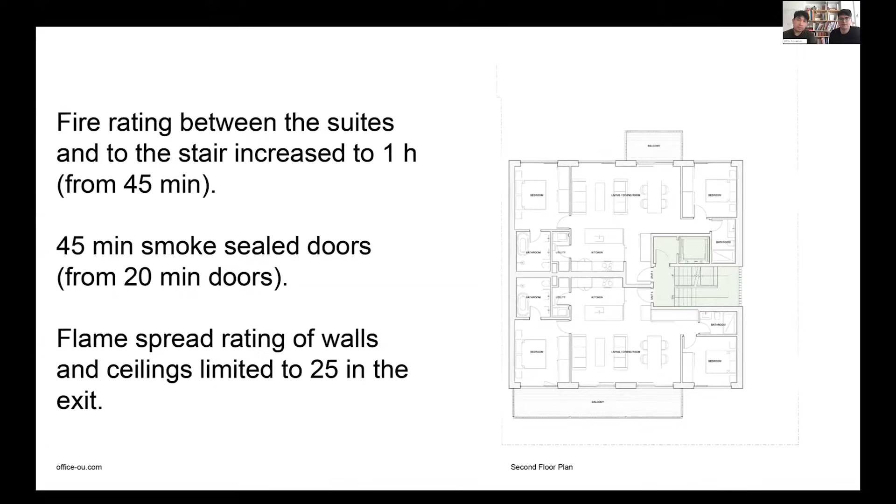And another really important mitigating factor, like many other single stair buildings, is that the occupant load is very low. We have at most 2 units per floor, and on the top floor, it's just one big unit, and the actual occupant load is only around 8 people per floor.

So I think it's worth mentioning that this is actually still a long way from the scale of buildings that are contemplated by, for example, the recent amendments to the BC Building Code, which were kind of imagined for much larger 6-story buildings that are already in Part 3. And I think what it shows is that there's a scale of missing middle that is even smaller than a lot of the things that are being discussed at the municipal or provincial level.

That is really important to talk about because it fits into the zoning of a city like Toronto, which is very, very restrictive in places, and there's a lot of neighborhood opposition to increasing density. So getting this scale of building to work is really important to us.

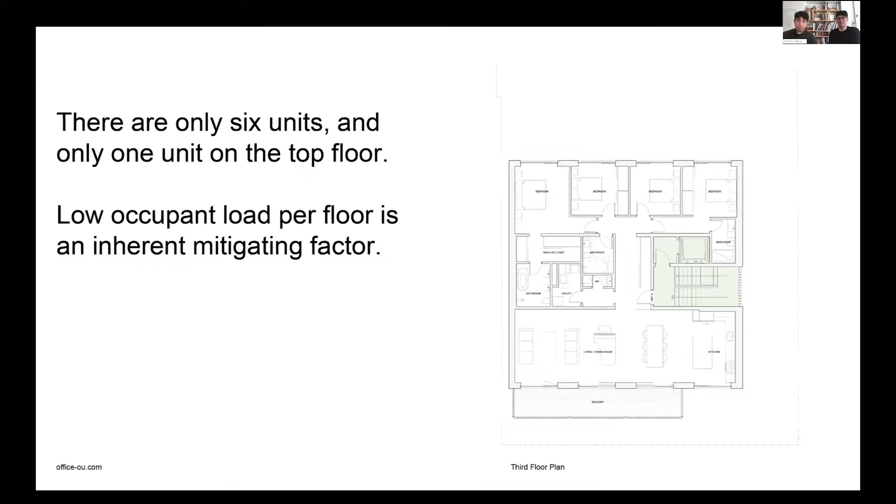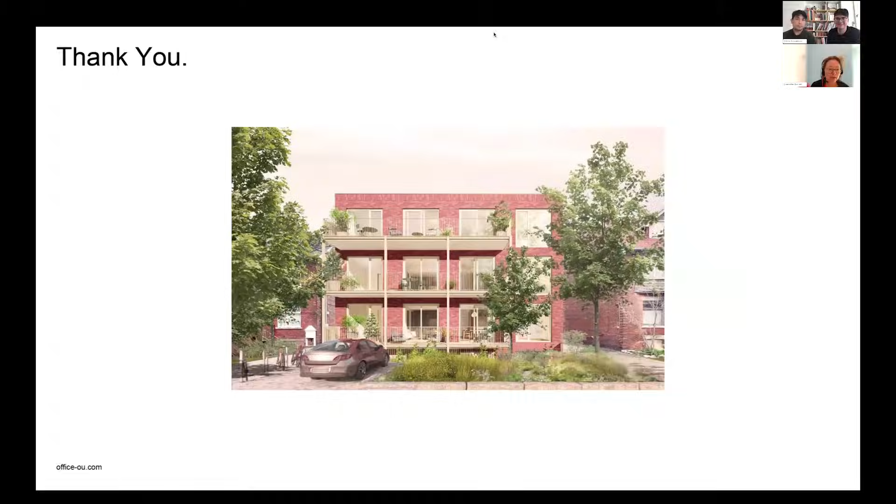Thanks, Jennifer. So in the Q&A, there's a couple of different questions on certain topical themes, particularly around accessibility and fire safety. Just to point out, the way that we've structured this event is that today there's a real focus on the architecture, the design of these buildings, the housing, diversity and options that come out of it. And tomorrow is a topical discussion really on safety and sustainability questions. In particular, the basis and the premise of alternative solutions, which is defined by the level of performance of the building code's prescriptive sections. But we'll just go through some of the questions in the Q&A that relate to today's theme.

Maybe one for Kevin as he was speaking to the prototypes. So the question from an anonymous attendee is, could you clarify the differences between a single stair and a scissor stair? The 6 prototypes seem to compare single stair with a scissor stair, but are these not both single stair configurations? What is the difference between a scissor stair and a single stair or 2 separate exit stairs?